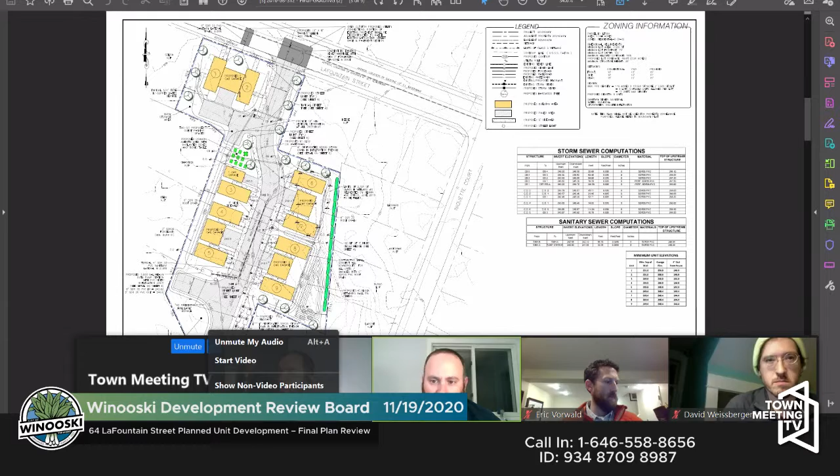So looking through the comments. I just had one question. I was trying to find the mute button. You said you confirmed with the state that the state wetland permit isn't needed, but have you coordinated with the Army Corps on wetland permitting? Yeah. So there would be a self-reporting form as we are proposing impacts, but they're less than 5,000 square feet. So an Army Corps permit wouldn't be required, but there would be a self-reporting form, so the Army Corps would have some documentation on that. Okay.

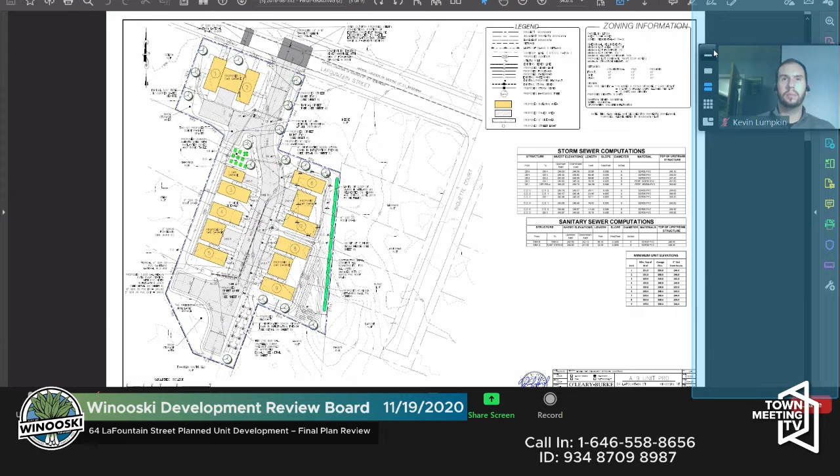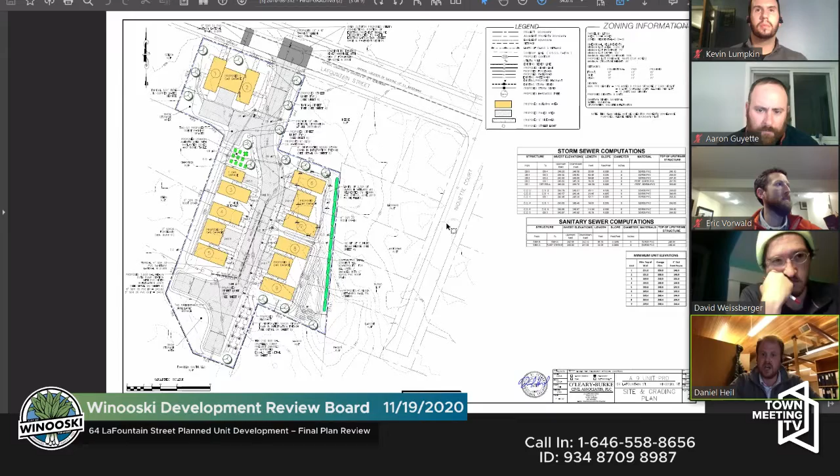So looking at those preliminary comments from April 16th, comment number 1, based on the elevations provided for the residential units, the site plan should be updated to include stairs with connections to the sidewalk where applicable from the doorway on each side of the unit. So the final plans tonight have been revised to depict those connections to the doors on each side of the unit. That is located on sheet 2.

Comment number 2, update the lighting. Can I jump in? I think that was my comment. Sure. Yeah, absolutely. Do you know if the garages are proposed to have doors on the side, or would you enter through the garage door on the front? That's a good question. As far as I know, you'd be entering through the front. I haven't seen anything depicting doors on the side of those garages. But if there were doors on the side too, we would be able to make that work with the sidewalk connections.

Well, what I had noticed was that obviously the finished floor of the houses is raised, and that's what I was talking about steps before. There needs to be some steps in there to get down from that door, or a walkway straight over into the garage, and then steps down. I think what I was pointing out is that there's not going to be a connection between the front and backyards of these places, because there's going to be something in the way to get out of that side door.

Well, there would be a connection on the other side of the unit to the backyard. True. Yeah. So each unit would have a connection to the backyard, but you're correct. There would be some stairs with a landing going up to the first floor level. So that side would be inaccessible to the backyard. Yeah. Okay.

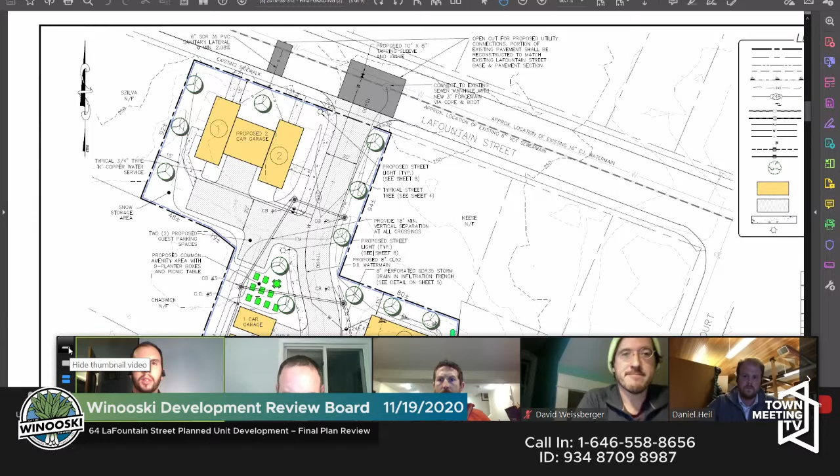And that was it for the comments from preliminary. I've had a chance to look over the staff notes, and I think they generally look good, and I didn't have any comments on those. So, thank you. Well, great. Thank you very much for that summary. Folks on the board, any questions about any of those updates since we last saw this application?

Just go for it. Okay, I have 2 questions about the road, and I think they're kind of related. So it sounds like the road will not actually meet the dimensional requirements of the city, and that it's up to us to approve it. So are you asking us to approve this as a private road that doesn't meet the city's requirements?

In John's email, he said if it was to be a public street, he'd be looking for 11-foot lanes and curbing. Given the tight nature of the site and how close the units already are to that road, we don't find it feasible to bump those out to 11 feet. It would just make the units closer. So we are seeking approval for the private road versus a public road. With a public road too, you would need, I believe maybe a 60 or 64 foot right of way, which isn't feasible on a parcel this size. You wouldn't achieve the desired density on this parcel.

Okay. So I'm not a lawyer, but I was reading the roadway maintenance agreement, and I see that in our regulations, it asks that an approved management plan or a draft of one be provided. Does that roadway maintenance agreement fulfill that, do you think? Or is that more of a specific thing? Like how often is this road going to be inspected? Who's going to do it? What are the standards?

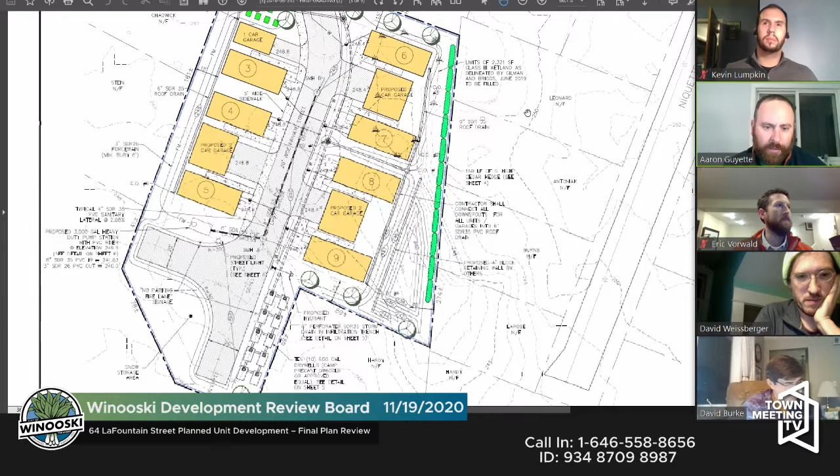I'm wondering about that area behind Unit 9 that it looks like it's just kind of a depression there where water will pond. What's that area used for? That's exactly what it's used for. It's used to pond the water that's running off from Niquette Court; currently it outfalls in that area. So there's an existing depression out there and it currently ponds there. So we looked at possibly conveying that area to the city stormwater system, but given the grades there, we can't convey that up to LaFountain Street.

And I believe the next street we could convey that to, there's a parcel or two in between. So we would need easements and there'd be a significant amount of storm sewer to run that down. And it would be running over multiple properties. So what we did was we looked at what was ponding out there today. We looked at that volume, and whatever we proposed, we wanted to maintain that volume to ensure that there wasn't an adverse impact on the ponding in that area.

It's also important to note that there is no easement. So on one hand, it's voluntary, but it's the smart or proper thing to do. It's where that water's always gone. So while they didn't have an easement, it's important that we're not taking away from it. Yeah, it looks like you've looked at that for a 10-year storm. What's your freeboard for it, from that ponding area?

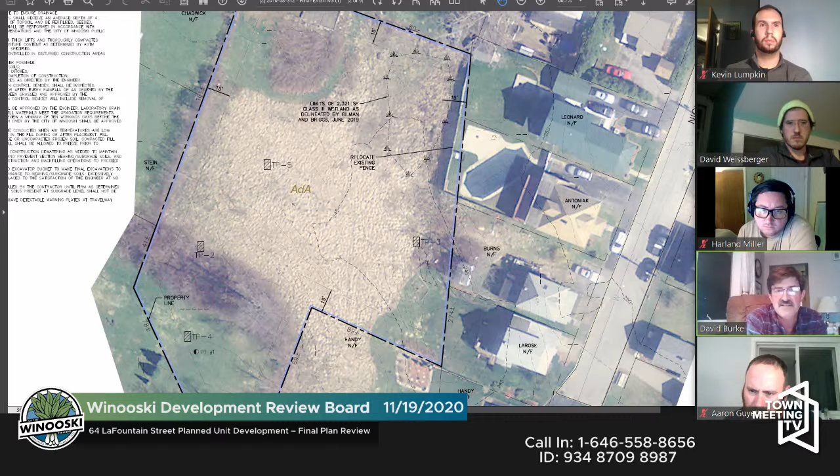So if you look at sheet 1, existing conditions, all the way to behind the Antoniaks, 2 houses up the street from Mr. LaRose, the contours, you can see the small wetland area at the top corner. From there, just a strip along the property line does contribute to that water now, and that will no longer contribute. So primarily it's the water off Niquette Court, but there will be some surface area removed that currently collects in that low area. As David said, a portion of our site does drain down that way now, which will be redirected to the dry wells and away from that low point.

You can see a 245 contour that's right above the relocate existing fence. It wraps around and comes down by Mr. LaRose. If you follow that contour, that's the area that goes to that lower corner, and it will no longer go there. So while our volume remains a little bit better than what's there, there will be less surface area going to that corner.

Any other discussion for this witness? All right, I think we may be ready to move on to the next person who has their hand raised. Thank you very much, Mr. LaRose, for your comments. Who's next? Next up is Gene. Gene Silva, whenever you're ready, go ahead.

So I'm Gene Silva, Bridget's here also. We live at 48 LaFountain Street. And I have three concerns. One, my concern about this pond is if it's going to be deeper, how deep, and will it be a hazard to small children? So right now there is a depression there. We'd be cutting it down anywhere from 1 foot to 3 feet.

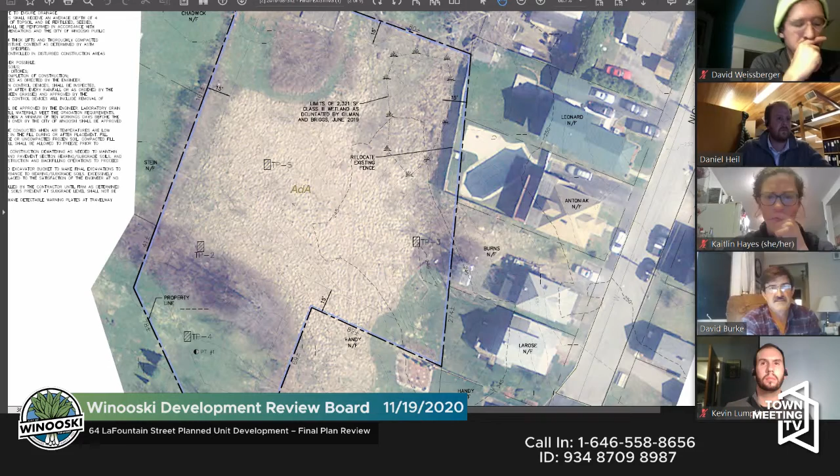My third concern is, my understanding is the sewage goes to LaFountain Street and gets into that sewer line, the wastewater line. Is that correct? That's correct, yeah. We have had incredible problems in the past with the city about sewage. And I'm just very, very concerned that we'll have problems at our house because of this. So those are my 3 concerns. Do you have anything, Bridge?

I actually had a couple questions. One of them is, I noticed there's a heavy-duty pump station in there, and I was just wondering what that was, and is that going to be noise? So the heavy duty is a reference to the thickness of the concrete. It has a pump inside of it. You will not be able to hear it.

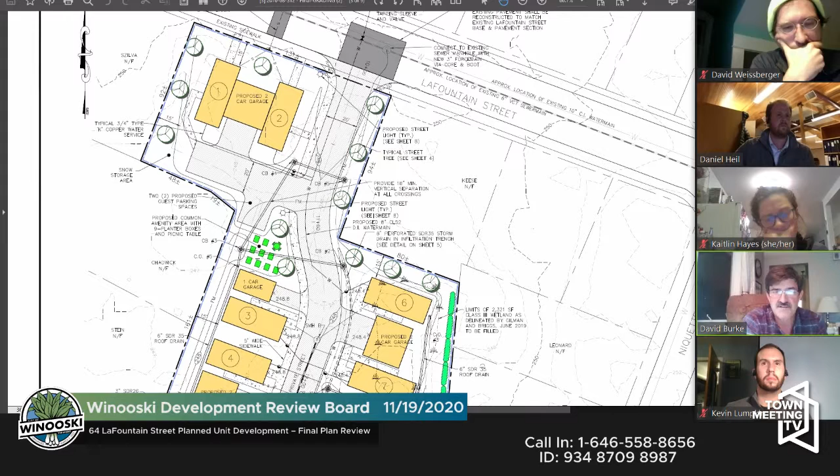Okay. So in front of Unit 3, there's a force main. We can't make it by gravity out to the road. So there's a gravity sewer that starts at Unit 3 and goes down to the end of the road. The pump is underwater within that station, so there's no sound from it. Typically, this type of thing will help the main sewer in the road because it's only going to kick on once or twice a day, and it helps keep the mainline sewer clean because it introduces some velocity to that sewer. So it should help out. It has been reviewed as part of the Public Works review.

The parking, again, you asked, and they are 2-bedroom units. These are 1-family homes, so we don't anticipate that there is going to be more than that. We are providing the 2 spaces per unit, so we do meet the town regs. And as Dan mentioned, there wasn't a lot of extra room, but we did add 2 spaces near the planter boxes and the picnic table for additional.

So LaFountain Street, it's not that we're saying people will park on LaFountain Street. They're not precluded from parking on LaFountain Street because it's a public road. Sure. But we're not counting on it. We meet the regulations independent of LaFountain Street.

I was also wondering, there are the circular items on the drawing that have like pie divisions in them. Are those trees? Yep, those are hardwood street trees. I think there's a total of 16 Freeman maples. Okay, that's what I was asking. I mean, trees are good. I love trees. I was wondering if there's anything you could do with trees that would help your stormwater problem. Well, I don't think we have a problem.

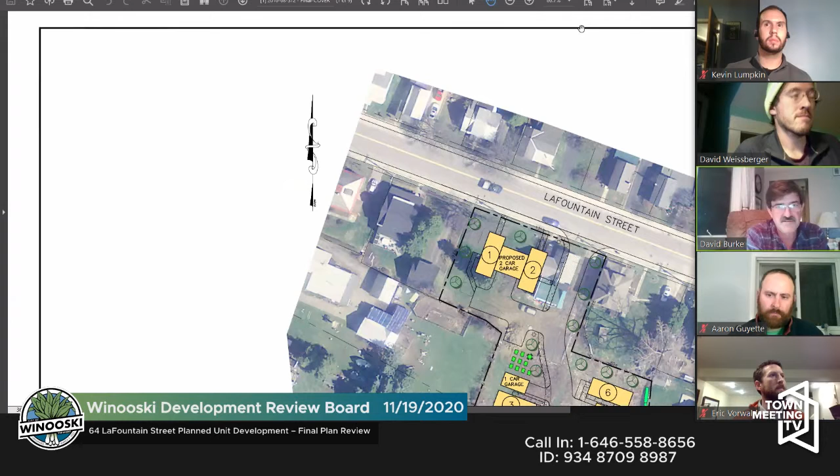Any questions from the board for this witness? Which side of LaFountain is the parking on currently? It's on the side of the street that the development is planned for. I think that's the south side. If the cover sheet can be pulled up, the ortho photo actually shows 3 cars parked along LaFountain there. So will there be some loss of parking? Will there be some no parking zones around that cut? It's at the existing opening, but I can't preclude. I don't know exactly where the line striping is to know if one space would be lost, because with the change to the 20-foot drive with the required radii, it's certainly wider than what was there.

Are there individual spaces striped currently? I don't know the answer to that. No, there's not. Yeah, David, I don't think LaFountain currently has the striping for the spaces. Any other questions for this witness? Okay, so we've got one more hand up. Great. So I think we'll elevate our next person to share any concerns. Whenever you're ready, Sam, go for it.

Hi, my name's Sam Rousseau. I live on Manseau Street. Just in regards to striping the street for parking, since that comment was brought up, it's been very helpful to have that done on Manseau Street. So thank you to the city for doing that. There's 2 components to my concern that have to do with the width of this private road. One is access for emergency vehicles, if there's any kind of parking allowed on this private road, and how do you plan to mitigate that?

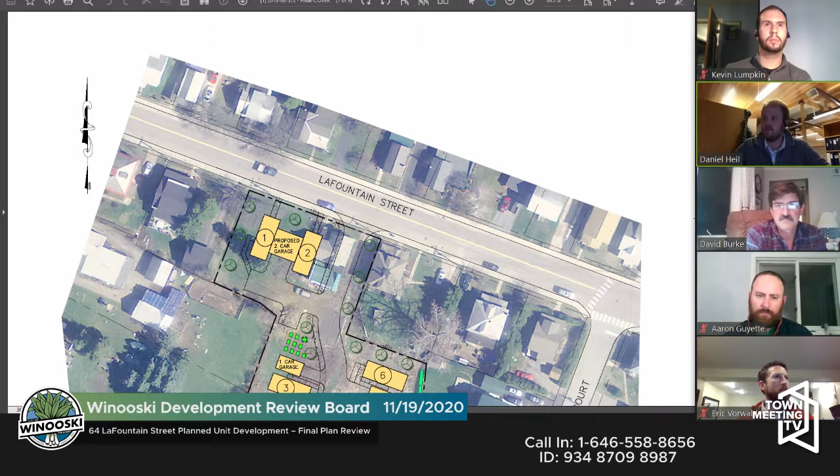So as far as the width goes, we are providing a 20-foot wide street. The fire chief has reviewed the plan, and he said he was okay with it, with the proposed turnarounds down on the southern side of the private road to allow the emergency vehicles to turn around. So the fire chief has said he is okay with that. And we do have some no parking signs down by the proposed fire lane at the turnaround area there.

And I note that 20 is not narrow. 20 is the old 30. Roads were overbuilt in the 60s, 70s, and into the 80s. And we've gotten smarter and trying not to overbuild road widths. If you went out and measured Route 2A in most places, you'd find with all that traffic, it's about 22 feet wide. So a lot of roads are down to 16-foot width, 18-foot width, certainly gone away from curbs in most locations, gone to infiltrate storm.

There was one comment early about stormwater being taken care of by the town. Well, that's the old method. It goes into catch basins and gets directed to some stream. New school is infiltrate, infiltrate, infiltrate. So you try to reduce the amount of impervious area, same as what they're doing with parking lots for shopping centers. Don't have 3 acres of parking if you only need 2 acres.

Is there parking allowed along the length of the road, the private road? It's not restricted per se until you get down by the turnaround, but because of the driveways, it's going to kind of be self-imposed. It's not part of the calculations, as far as meeting the requirements of 2 spaces per unit. And I think is it 1.5 or 2 per unit, but I know we meet the requirements. And again, they're 2-bedroom units, which also helps.

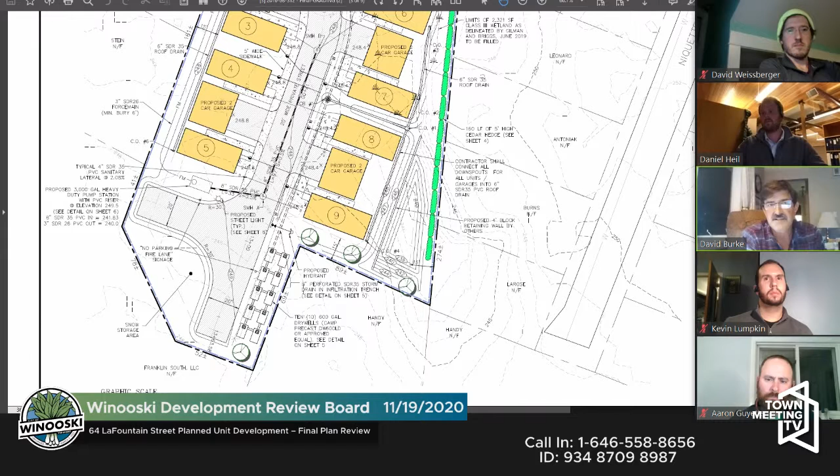I've lost my train of thought. There was one other comment the last gentleman made. As far as maintenance for the private road, I looked at the roadway. All 9 units. So while that duplex in the front does face LaFountain, it does come off this entrance and has its drive in the back. So while it may or may not use the rest of the road, it will be 1/9. They'll each be 1/9 of the HOA and 1/9 of ongoing costs.

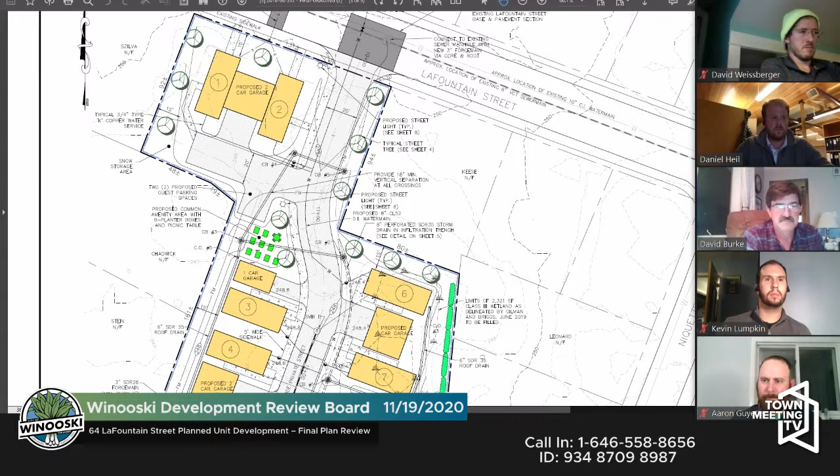So I would rely on the development review board to have an idea of what that type of cost would be. I'm thinking about a similar length of stretch on Manseau Street needing repair, and that cost would essentially be divided over all the citizens of Winooski through our taxes. However, this stretch of roadway, if it needed significant repair, seems like it could be quite expensive. So I'm just asking the review board to take that into consideration to see if a private street this size could feasibly be maintained by 9 units. Do we have a private road in Winooski that's this size with a similar population density that has been maintained adequately as a precedent?

I guess the only thing I'd say is that, with the drive going towards 1-2, you've got about 400 feet of 20-foot wide road, which isn't very much compared to a small parking lot. You're talking 8,000 square feet of pavement. So it's not a large area to maintain. The cross section that we have should enjoy about a 30-year life cycle before pavement would need to be topped. So we never see that this road would need to be reconstructed because it's going to be constructed properly. What would happen typically in about 30 years is they would be considering putting on a shim coat of pavement. And I'll try to do a quick calculation before we sign off as to what that'll be.

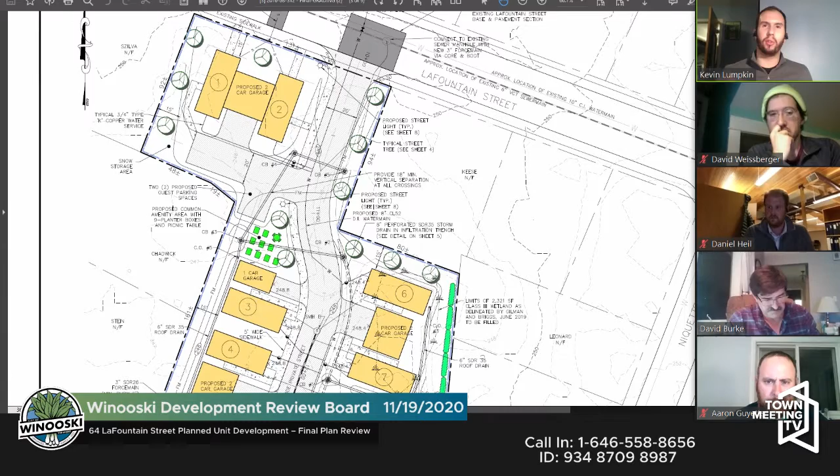So just to give everyone who is here watching a preview of what's going to happen next, once we close this hearing, we're going to go into a different Zoom as a DRB and do our deliberative session that is closed to the public. And what we do is we issue a written decision on the application in front of us within 45 days of today's date. That'll be available from Eric and the city, and whenever it's issued, it's typically a couple weeks before that happens. And so any questions about that, stay in touch with Eric, and I'm sure he'll let whoever needs to know.

I think we're waiting on math for our final piece. So a 1-inch shim coat just for the roadway, not the driveways, at today's cost would be about $6,000. So you could expect that it might be $7,000. Pretty easy to incorporate into an HOA. Again, that would be anticipated about a 30-year life cycle. That life cycle can be longer if they're proactive on crack repair. As cracks form, if they put emulsion on those, that helps out greatly too. So it's not a large number. Okay, well, we'll take that into consideration along with Mr. Rousseau's comments during our deliberations.

So I think we're ready to move on from item 5 on our agenda to item 6, which is city updates. Eric, you got any city updates? So the only thing I wanted to update you on is that at, I believe it was the last meeting, you heard the appeal of the notice of violation to 133 Elm Street. You upheld that notice of violation. That has subsequently been appealed to the Superior Court's Environmental Division. So more to come on that. But that is the only update that I have for you at this time. Cool.